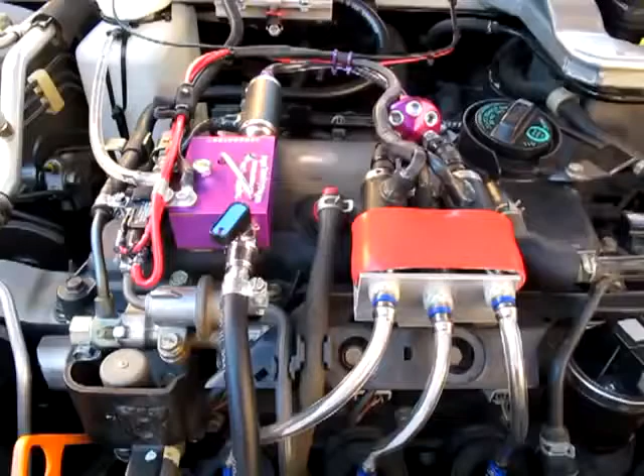Hello, this is the AquaTune HB, and there are several different units and models available. I've been running the system now for approximately 2 months, and I'm very happy with the results, the fuel efficiency and the horsepower increase.

AquaTune guarantees a 25% increase in fuel efficiency, minimum. If you do not achieve a minimum increase of 25% fuel efficiency, there's a money-back guarantee. So with that, and with my study of the theory of how the system works, I was very comfortable in trying the system.

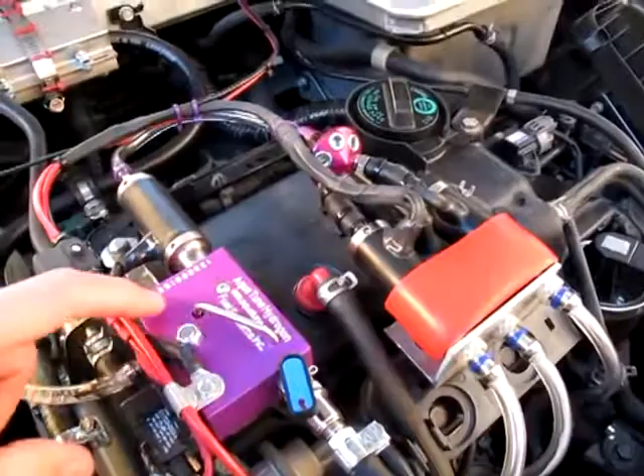I tried the system. When you buy it, it comes with this unit here, basically the processor, and 1 generator. I added 3 generators because I wanted more hydrogen. You have that option, but these cost extra, you buy them separately. The unit comes with this here.

This part is what this car is using. Each car has its own setup specifics, and you'll get setup instructions for your particular model car.

This is the water reservoir here, and this is a smaller one. It holds 2 liters of water, approximately half a gallon. They have bigger water reservoirs as well, but this is a small car, only a 1 liter engine, so I didn't need a very big water reservoir.

I want to go over some things about how the system works, how I understand it to work. Basically, this system is 60% hydrogen, 40% water injection.

Let me show you the older technology. This is something I purchased approximately a couple years ago, a hydrogen generator. You can see the size of it, it's fairly large. This unit requires approximately 12.5 amps, 12 volts, and produces approximately 1.8 liters of hydrogen per minute at 12.5 amps.

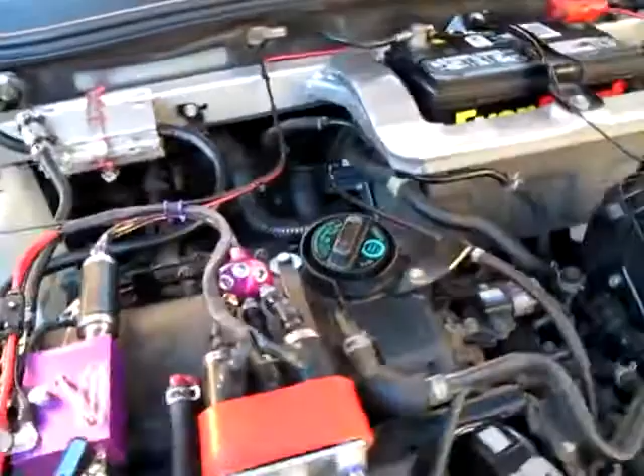These generators here only require 1.5 amps to make 2.5 liters of hydrogen per minute. That's each generator. I'm running 4 generators, 3 here and this unit here.

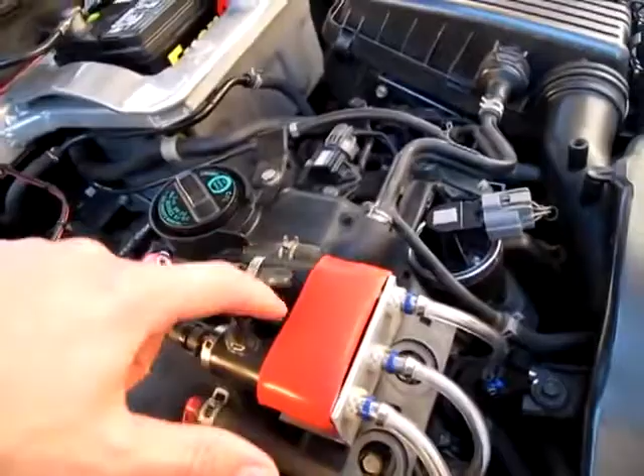The distilled water, which is about 88 cents per gallon as of the date of making this video, Walmart sells distilled water for 88 cents a gallon. You can get distilled water probably at just about any market.

The water is pulled in through the processor. Actually, I'm going to read to you what AquaTune has on their website. You could read this for yourself by going to the AquaTune website. I'll read this and then explain, as I'm reading, what part of the unit I'm talking about.

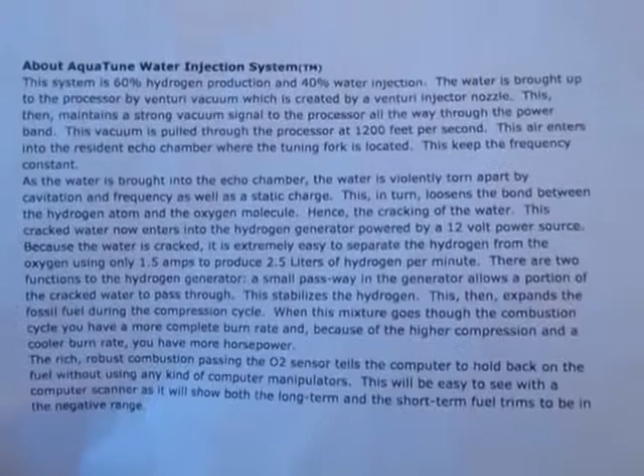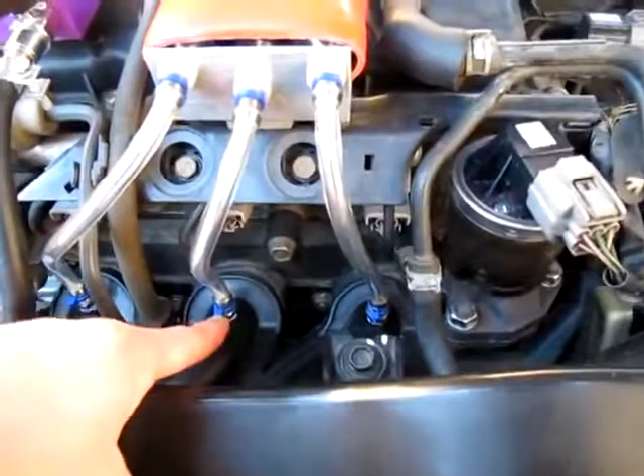AquaTune water injection system: this system is 60% hydrogen production and 40% water injection. The water is brought up to the processor by Venturi vacuum. This is the processor, so the water is brought up by Venturi vacuum, which comes from these Venturi nozzles in here. These are nozzles that go into the intake manifold.

If you do a Google search on Venturi vacuum, V-E-N-T-U-R-I, V-A-C-U-U-M, you'll see the theory of how Venturi works. Basically, the air coming through the intake manifold passes the Venturi nozzles and creates a vacuum inside this unit, which maintains a vacuum throughout the power band of the engine running.

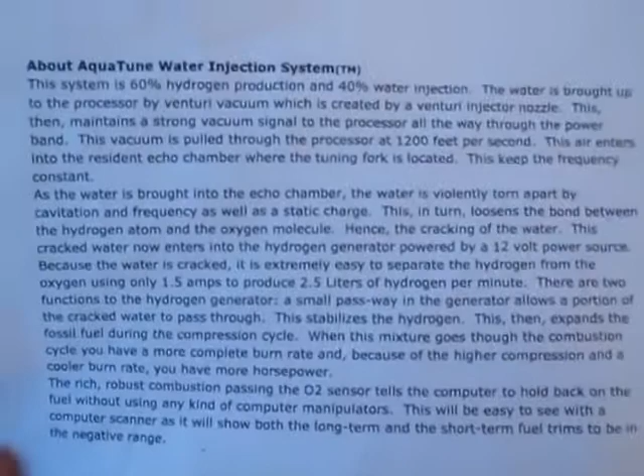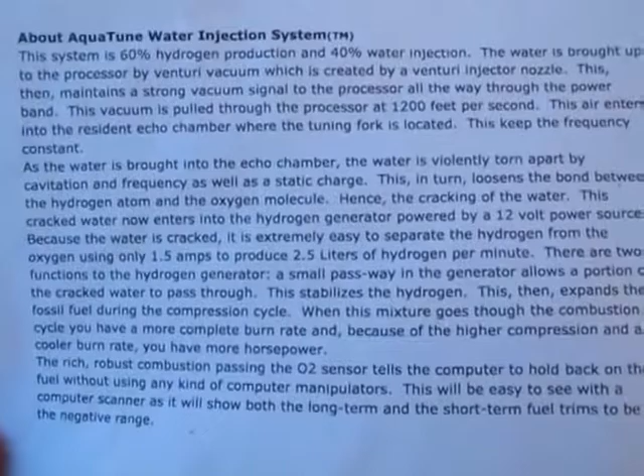Let me just read this to you. The water is brought up to the processor by Venturi vacuum, which is created by a Venturi injector nozzle. This then maintains a strong vacuum signal to the processor all the way through the power band. The vacuum is pulled through the processor at 1200 feet per second. The air comes through here, this is the processor, and there's a very small passage where the air can squeeze through like a needle, and that's where you're getting the 1200 feet per second of air passing through that needle-like area.

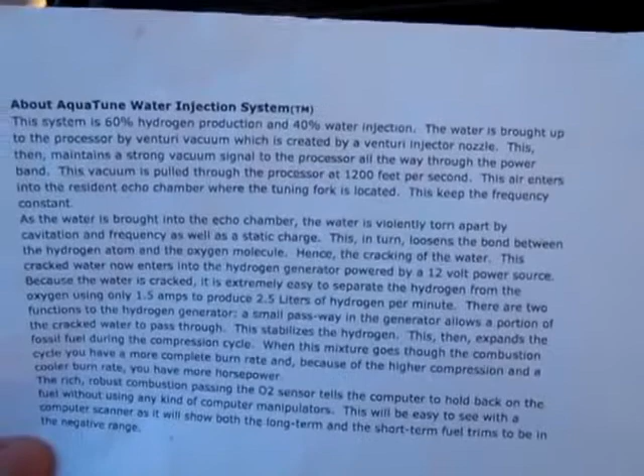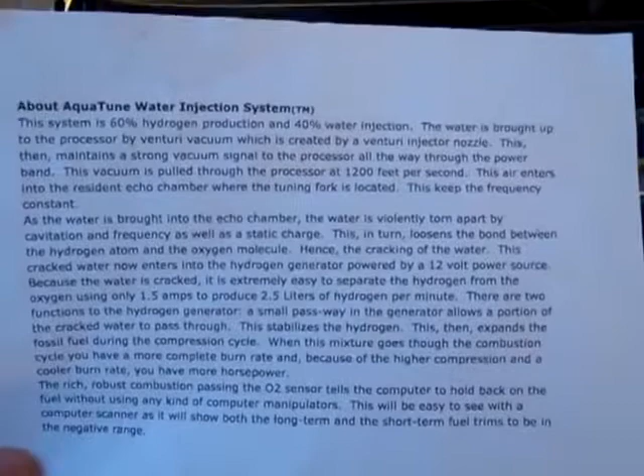This air enters into the resident echo chamber where the tuning fork is located. This keeps the frequency constant. As the water is brought into the echo chamber, so we have air coming in and we have water coming in, to the echo chamber.

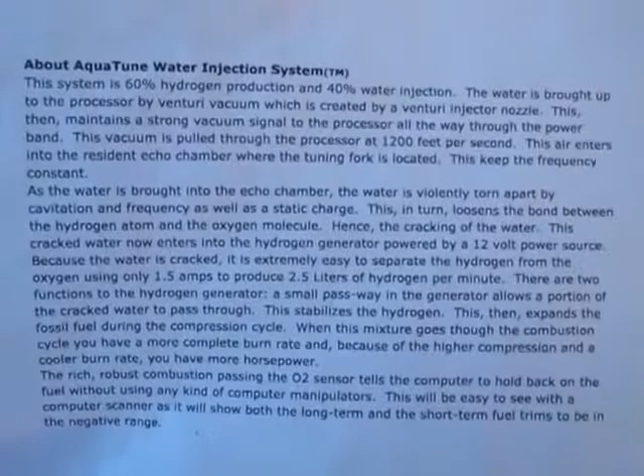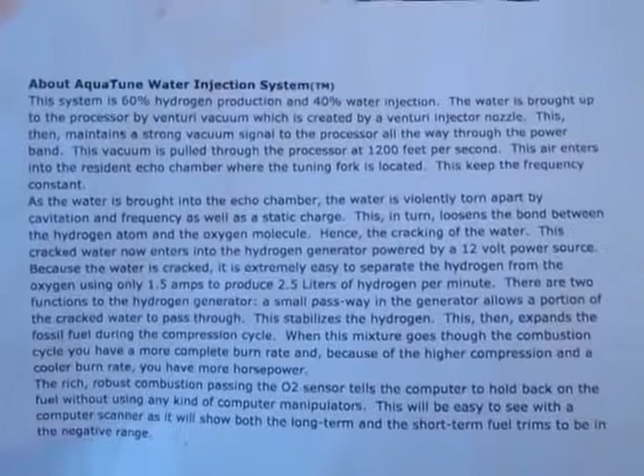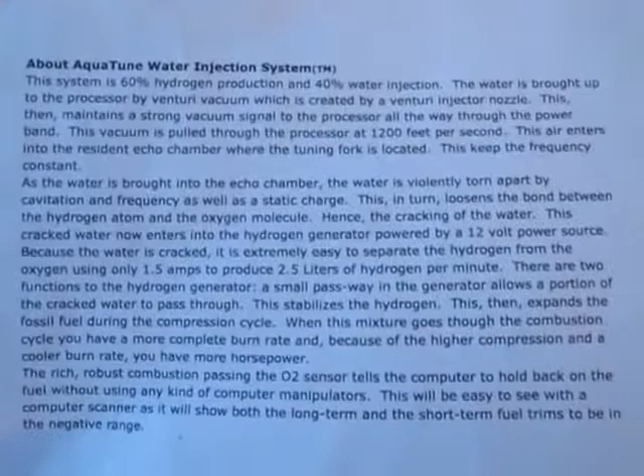This air enters into the resident echo chamber where the tuning fork is located. This keeps the frequency constant. As the water is brought into the echo chamber, the water is violently torn apart by cavitation and frequency, as well as a static charge. This static charge is like static electricity, like if you rub your feet on the carpet and touch something, it shocks you. Water can also generate static electricity, which is part of how the system works.

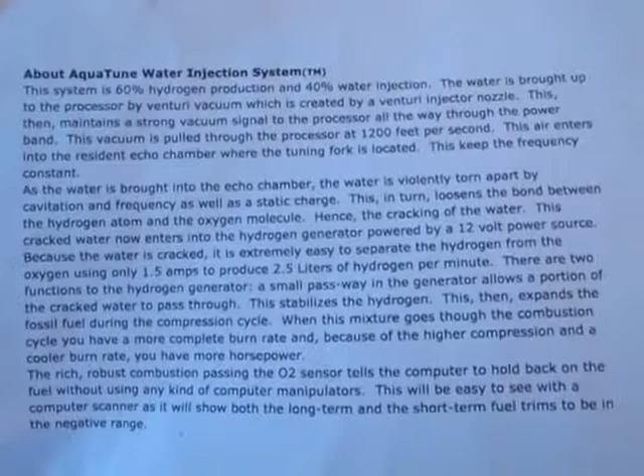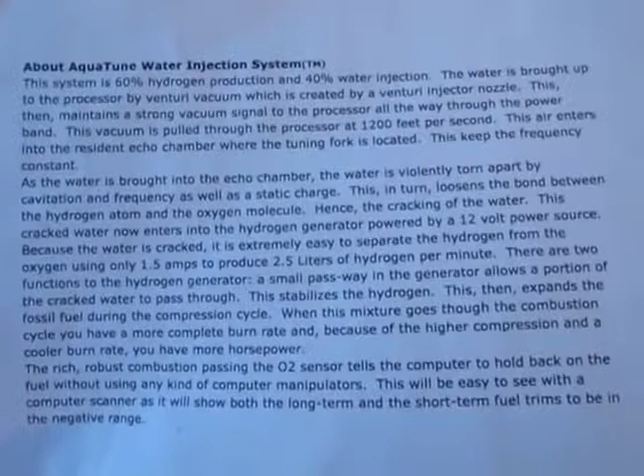This system here, the AquaTune, loosens the bond between the hydrogen and the oxygen, hence the cracking of the water. Cracked water refers to the covalent bond that holds the water molecule together, holding the oxygen and hydrogen together.

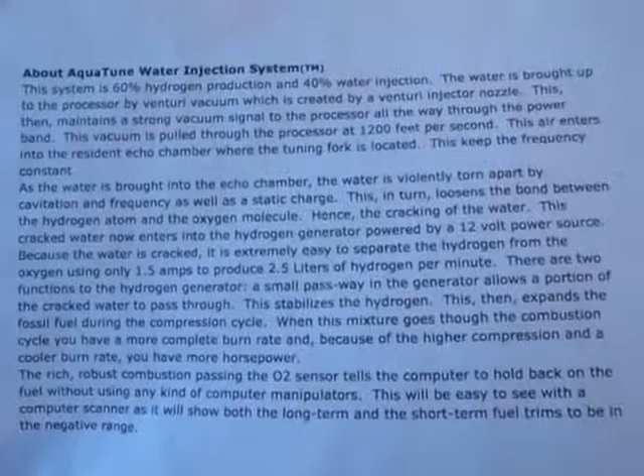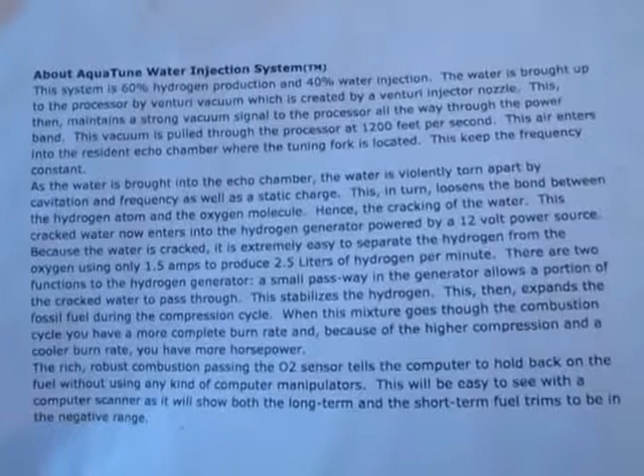I'm saying this myself, I'm not reading this. I'm just telling you, if you want to research this on your own, you can research the covalent bond of the water molecule. So it's basically weakening the covalent bond. When they say cracked water, that's weakening the covalent bond, hence the cracking of the water.

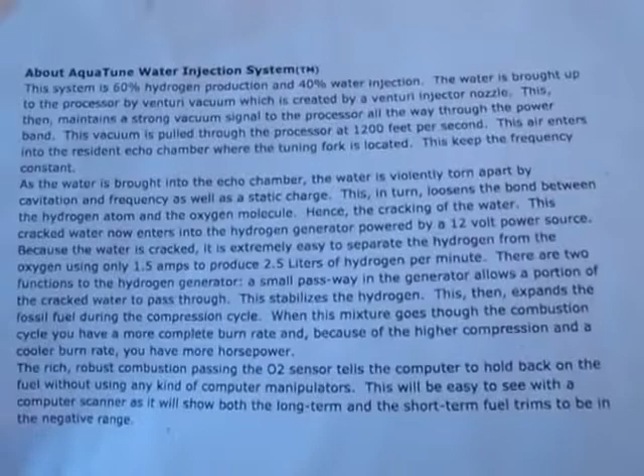This cracked water now enters into the hydrogen generator, powered by a 12-volt power source. So basically you plug it into your car battery, hooking it directly into the battery there.

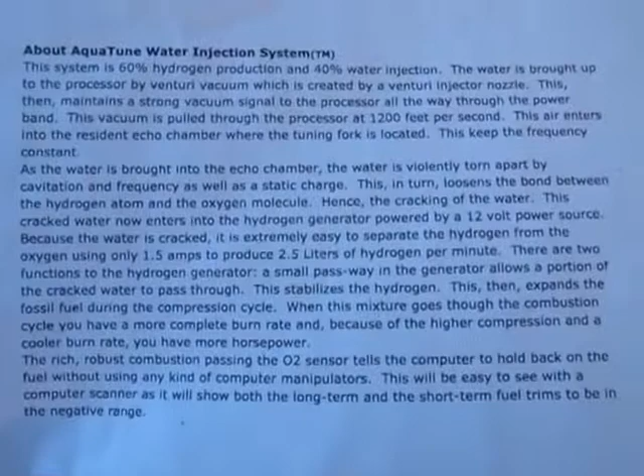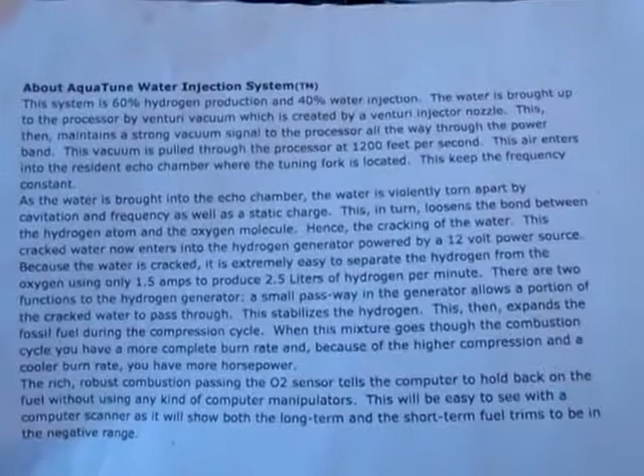Because the water is cracked, the covalent bond is now weak and it's ready to separate into hydrogen and oxygen. Because the water is cracked, it's extremely easy to separate the hydrogen from the oxygen using only 1.5 amps to produce 2.5 liters of hydrogen per minute.

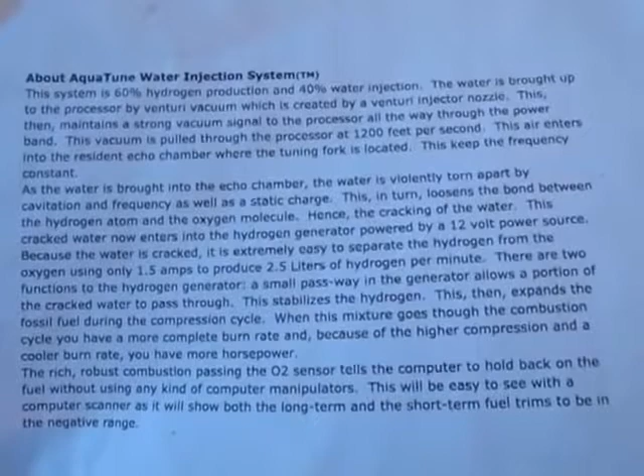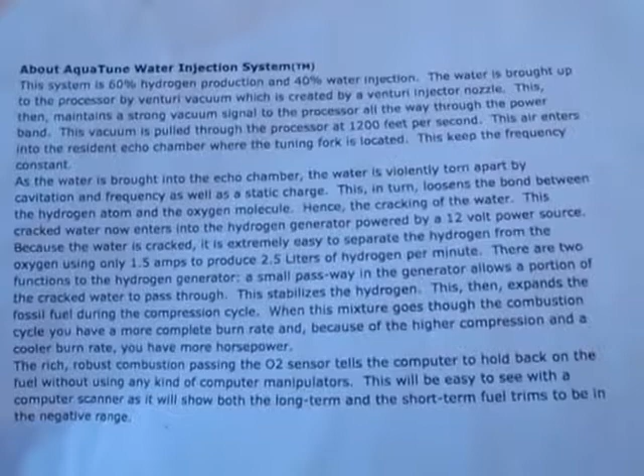There are two functions to the hydrogen generator. A small passage in the generator allows a portion of the cracked water to pass through. This stabilizes the hydrogen, which then expands the fossil fuel during the compression cycle.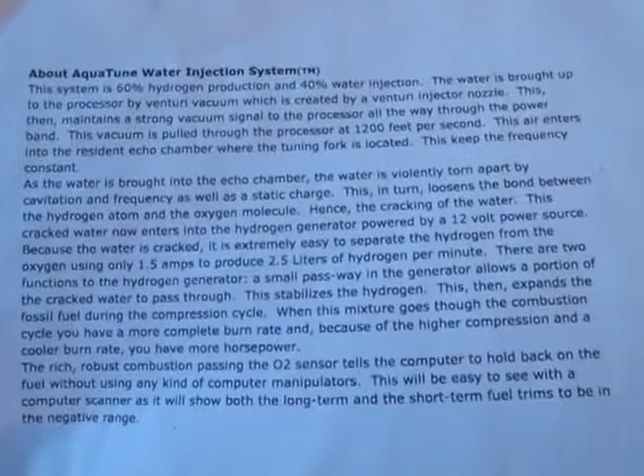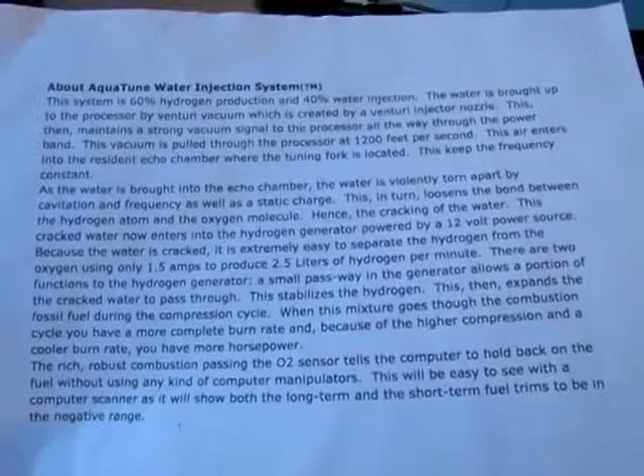When this mixture goes through the combustion cycle, you get a more complete burn rate, and because of the higher compression and a cooler burn rate, you get more horsepower. The rich, robust combustion passing the O2 sensor tells the computer to hold back on the fuel, without using any kind of computer manipulators. This will be easy to see with a computer scanner, as it will show the long-term and short-term fuel trims to be in the negative range.

Now I want to compare this system with the older technology, I'm calling it that. I know people still use the other generators, and I know people still use these, but what I like is a lot of hydrogen. I wanted a lot of hydrogen, and this produced much more hydrogen than that unit I have over there, and it takes much less power.

All four of these, because they only take 1.5 amps each, all four take approximately 6 amps and produce 4 times 2.5 liters of hydrogen per minute. So basically, that's quite efficient. Very efficient, which is what I like about it.

I'm trying to think of what I can say next. What I did here is I set up a little demonstration of a generator, basically. Excuse me one moment.

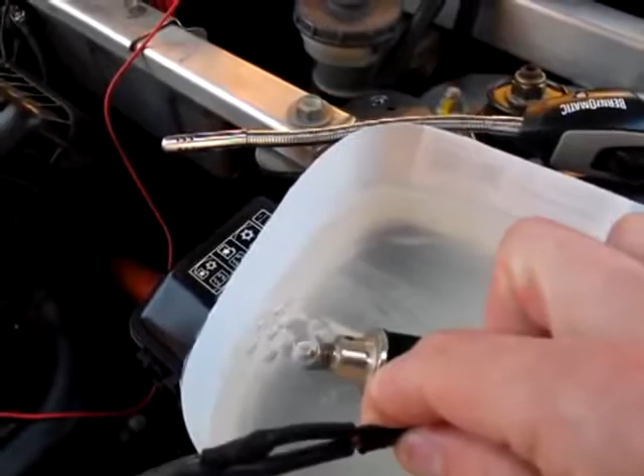Right here we have one of the generators. This is one of the AquaTune generators, okay? This part here that screws in, that has the threads on it, that's the part that you see. That's just air bubbles right there, because we're not powered up yet.

See, the positive wire's right here, that's the one you see here. That's this unit here that screws into this, okay? And each of these have wires going to them, see, these are the wires. There's a positive and a negative on each of these. They go around, and this is a fuse. Then it just hooks into the battery, into the positive of the battery and to the ground.

So here I have a little setup to show you the hydrogen production. I have a meter, an amp meter, okay? This is on the positive wire, which is not connected to the battery yet. Here is our little generator, which produces 2.5 liters of hydrogen per minute at only 1.5 amps.

Now the amperage will be a little higher here, like 1.9 or approximately, because we're using faucet water. The way this system works, you do not have to use electrolyte, because the static charge of the water going through the unit, through the processor, acts like an electrolyte. That's the way the system works.

But here, because I want to show you the hydrogen production, so you can see that the generators do produce hydrogen, we are using faucet water. Faucet water, because it has minerals and stuff in it, actually acts like an electrolyte. So that's why the amperage will be a little bit higher, but you'll still see how much bubbles it produces.

So let me go ahead and put my earplugs in.

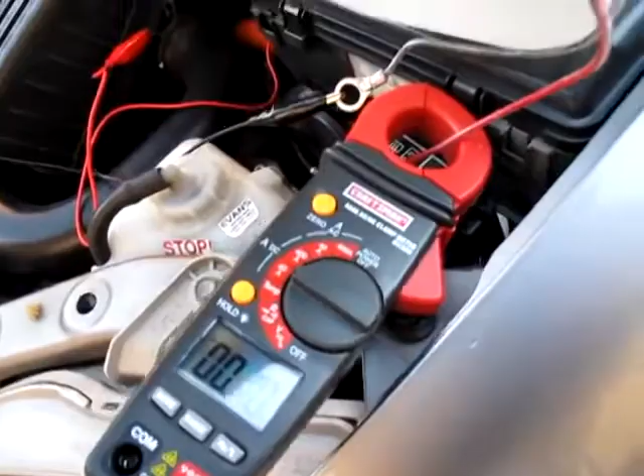Okay, so I'm going to go ahead and hook up the positive here. As you can see, this is the negative wire going to the negative of this generator, the AquaTune generator. And the positive, as you can see here, goes — well, I have it here for now, and I'm going to go ahead and hook it up, and then light the bubbles coming out of the generator so you can see them, that this is actually producing hydrogen.

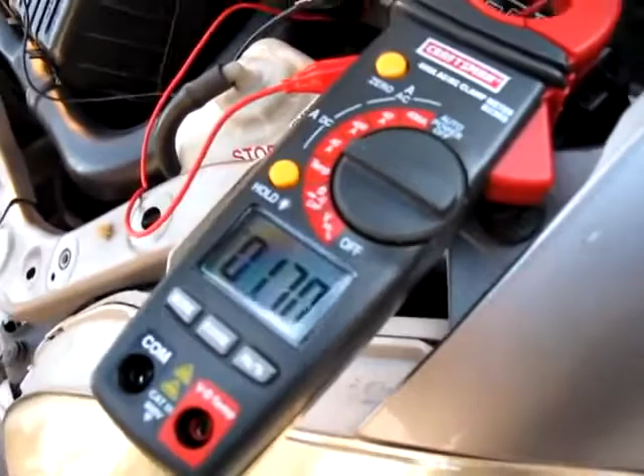Okay, what are we at? We're at 1.6 amps, okay? And let's light the hydrogen bubbles.

Okay, so you can see that this is definitely producing hydrogen, orthohydrogen. Orthohydrogen is the same hydrogen that powers the space shuttle. It's extremely powerful, extremely explosive.

And it's produced on demand. We're not storing hydrogen anywhere. The car does not have any hydrogen tanks on it. So basically, we're producing the hydrogen. This is your fuel, water, distilled water, getting pulled through the system with vacuum.

And if you want to understand how vacuum is maintained, like I was saying earlier, just read up on Venturi nozzles, study the Venturi nozzle, or read up on Venturi and the way that works. There's theory behind how it works, because when you're at wide open throttle, the vacuum in the intake manifold is very low, but because there's airflow coming past the Venturi nozzles, that creates the vacuum, that maintains the vacuum signal, as AquaTune says. So that's basically the way the system works.

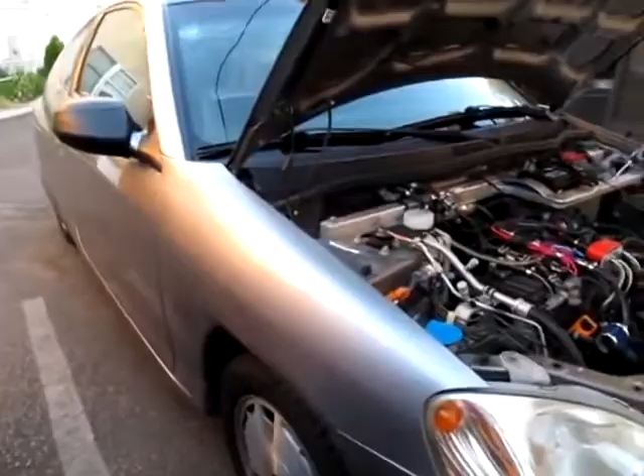But with this system, I basically turned this into a hydrogen hybrid. So instead of using the high voltage electric battery, which is a 144 volt nickel metal hydride battery, 120 D-size cells in the back, I've turned that off and disabled it because this car has a lot of miles and that battery is very weak. So instead of buying a new battery, I bought this system for about half the cost of buying a new battery, and the car is actually faster than it was when I had the hybrid battery.

Although when you first take off on this car, because it has very tall gears, it doesn't have the same torque. So it did have more torque for just getting going, but it now has a lot more power throughout the whole power band with this system.

I am planning on fixing the batteries at some point in this car, but I'm quite happy with the AquaTune system, and I wanted to share this experience with you.

This is not just a water injection system. It's primarily hydrogen injection, and it also injects water. Even that water that's being injected is also usable energy with the way that it works. It's very detailed and very technical, and I love understanding the way things work. I'll make another video that goes into more detail about this system.